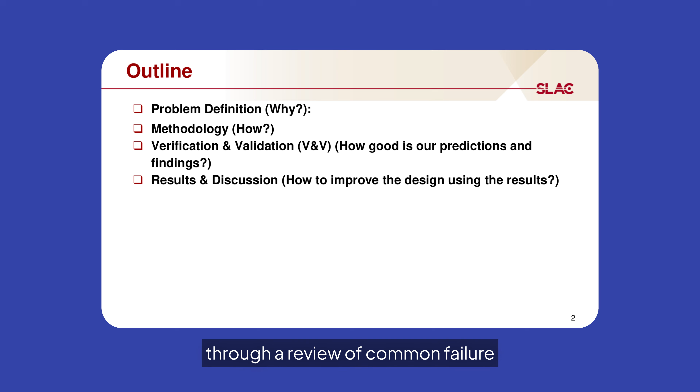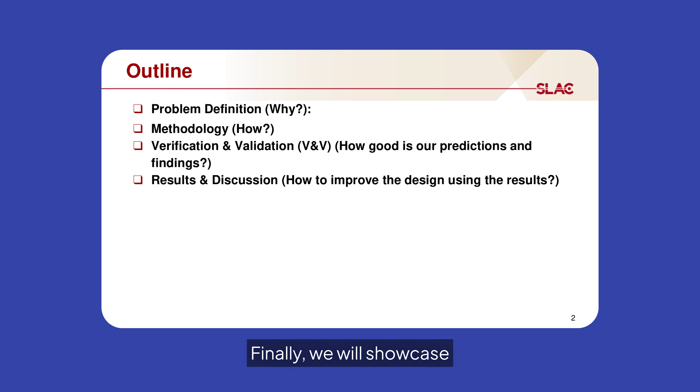Today's session is structured as follows. We will begin by defining the problem through a review of common failure mechanisms in microelectronics and semiconductor devices. We will then introduce our methodology for addressing reliability throughout the design and development lifecycle. Finally, we will showcase representative case studies and discuss how we ensure that our reliability engineering methods accurately correlate with real-world behavior. Let's get started.

Let's first review why reliability engineering is important in the life cycle of microelectronics and semiconductor devices. With continued hardware scaling and rising computational demand, electronic components are exposed to increasingly severe thermal and electrical stresses. Reliability modeling and testing enable us to understand how these stresses can evolve into failures over time.

At the same time, the effect of these failures is very important. For example, the financial impact of unplanned downtime in a data center, often reaching millions of dollars per hour, makes reliability a critical business priority. In industries such as aerospace, medical devices, and national infrastructure, failures are not only costly, but can pose serious safety risks. Reliability engineering ensures that these systems meet the stringent performance and safety requirements demanded by their applications.

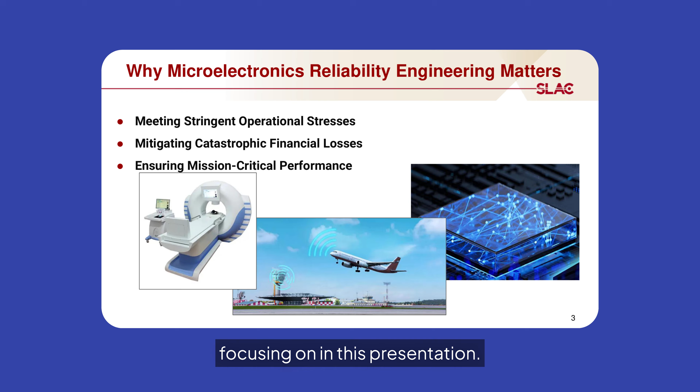With that context, let's take a closer look at the scope of reliability engineering we are focusing on in this presentation. Reliability engineering is an essential part of the design cycle. It provides an end-to-end framework that transforms performance and lifetime requirements into actionable test items, which then become part of the design validation plan and report, DVP&R.

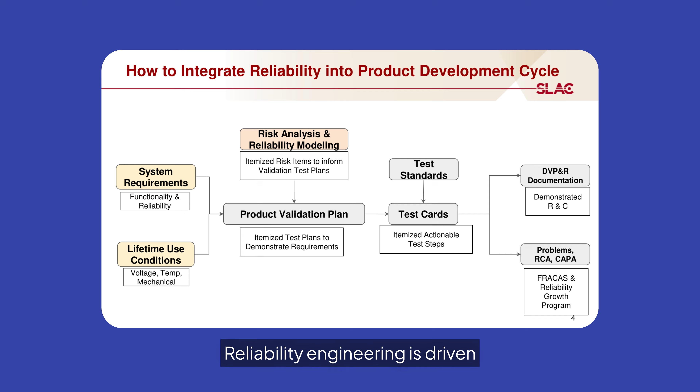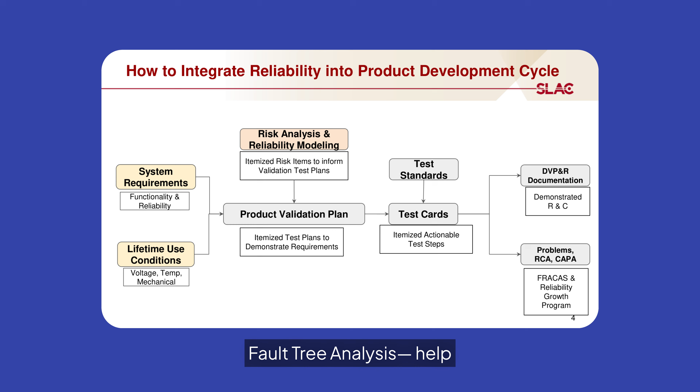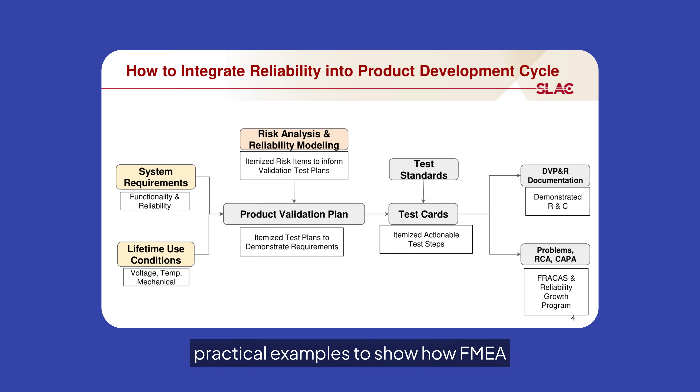Reliability engineering is driven by structured risk assessment and enables a graded approach to design validation. We use tools such as failure mode and effects analysis, FMEA, to identify and manage risk. Reliability modeling methods, such as fault tree analysis, help reveal reliability bottlenecks and quantify system-level risks. We will review several practical examples to show how FMEA and fault tree modeling supports robust, failure-resistant electronic system design.

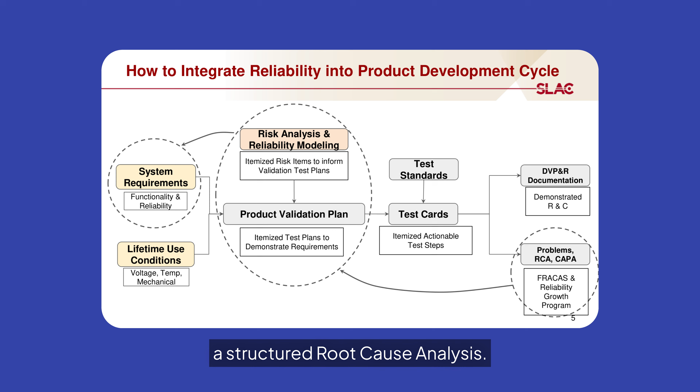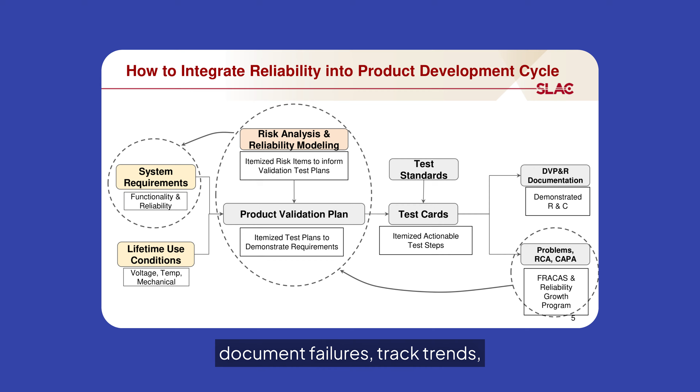The importance of a strong feedback loop in the product design cycle is illustrated here. Any issues observed during reliability testing must be fed back into the design process through a structured root cause analysis. The Failure Reporting, Analysis, and Corrective Action System, FRACAS, is the industry standard framework used to document failures, track trends, and identify opportunities for both corrective actions and preventive actions, CAPA.

CAPA is a formal structured program that requires proper documentation, traceability, and verification of effectiveness. In many industries, especially medical, aerospace, and other regulated sectors, CAPA activities must also be communicated to the appropriate certification or regulatory agencies.

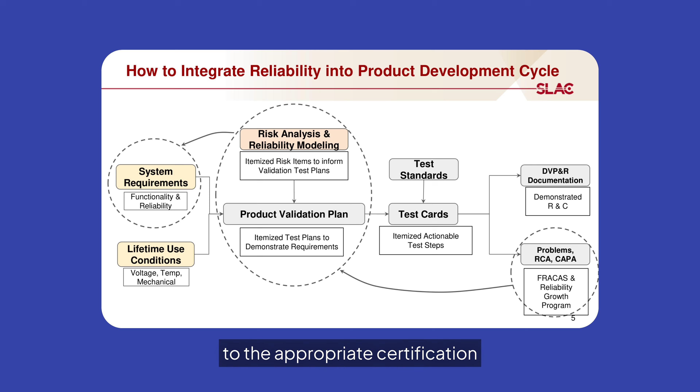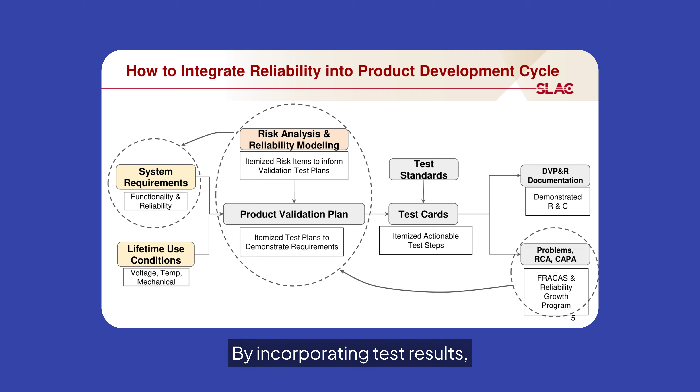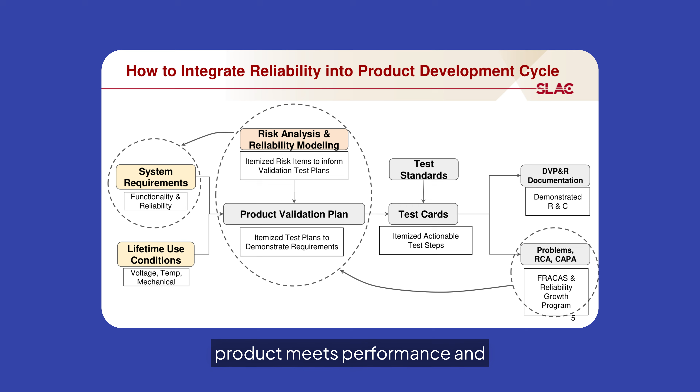In parallel, a reliability growth program provides a systematic approach for identifying and eliminating failure modes throughout development. By incorporating test results, corrective actions, and design improvements, the program quantitatively measures reliability improvement over time, ensuring that the final product meets performance and lifetime requirements.

Now let's dive into a specific example where we walk through three main reliability engineering steps: risk assessment, reliability modeling, and reliability test planning.

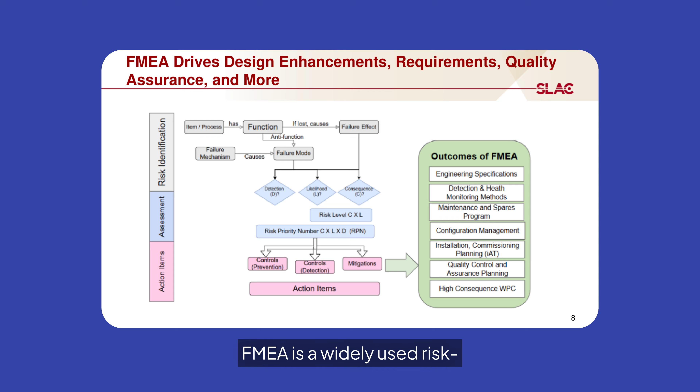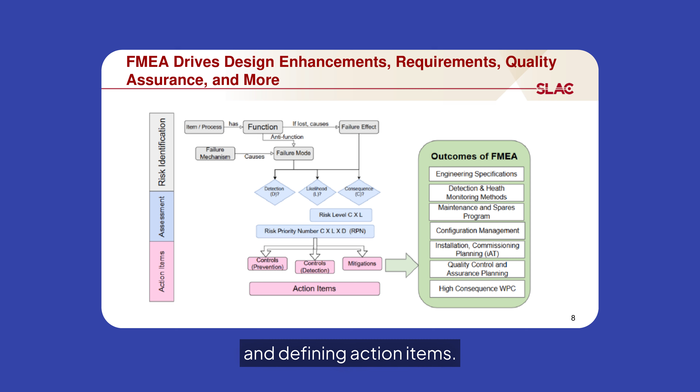First, let's focus on risk assessment and examine how it forms the backbone of our reliability engineering approach. FMEA is a widely used risk assessment tool that provides a qualitative measure of risk. The process consists of three major steps: risk identification, risk assessment, and defining action items.

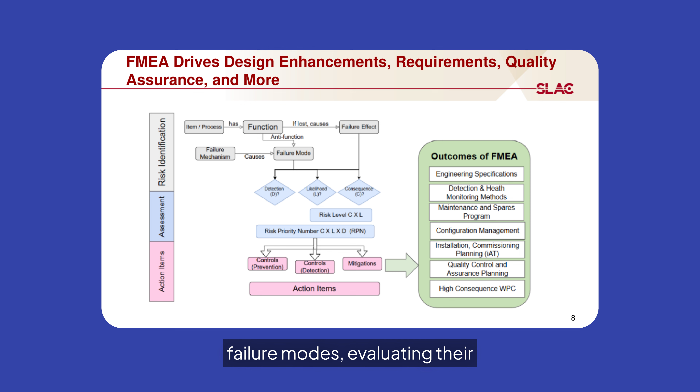The diagram illustrates the typical workflow, beginning with the identification of potential failure modes, evaluating their severity, occurrence, and detectability, and finally translating the resulting risk mitigation strategies into actionable outputs such as updated requirements, quality assurance plans, and other control measures.

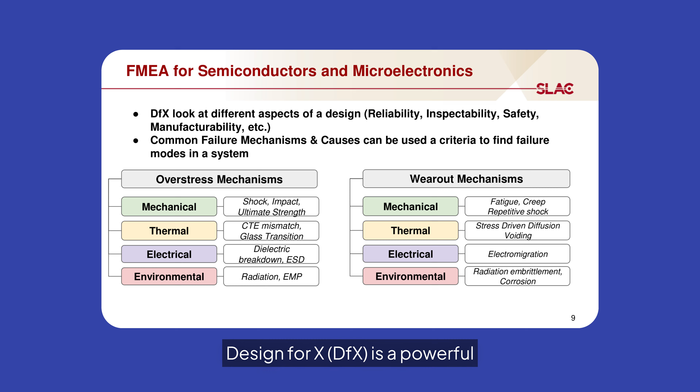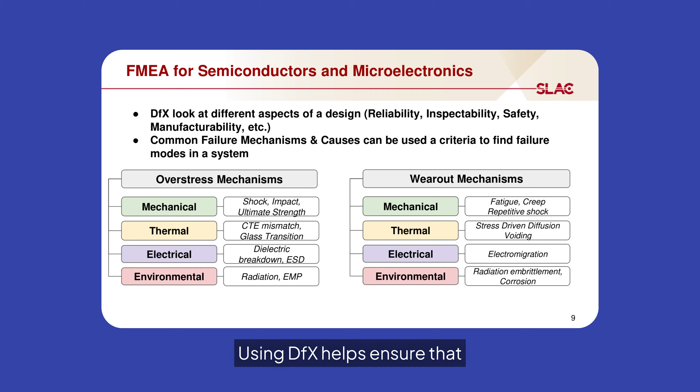Design for X, DFX, is a powerful framework for identifying potential failure modes and their root causes early in the design cycle. The X can represent reliability, maintainability, inspectability, safety, manufacturability, and more. Using DFX helps ensure that risks are systematically addressed rather than discovered late in testing or in the field.

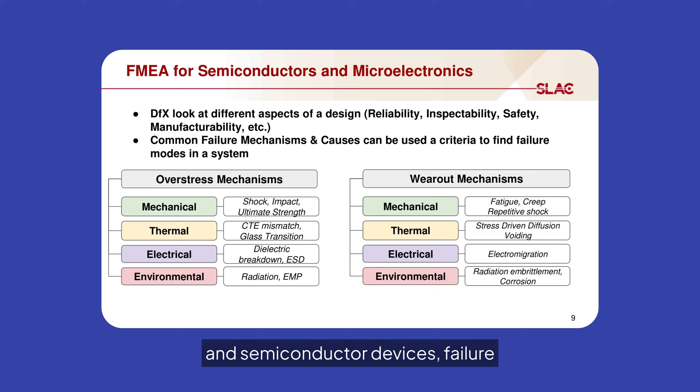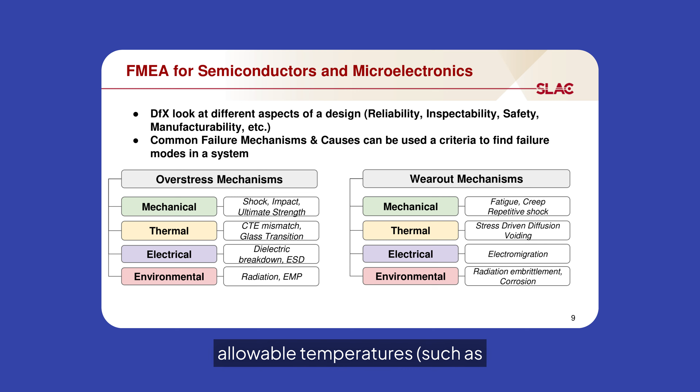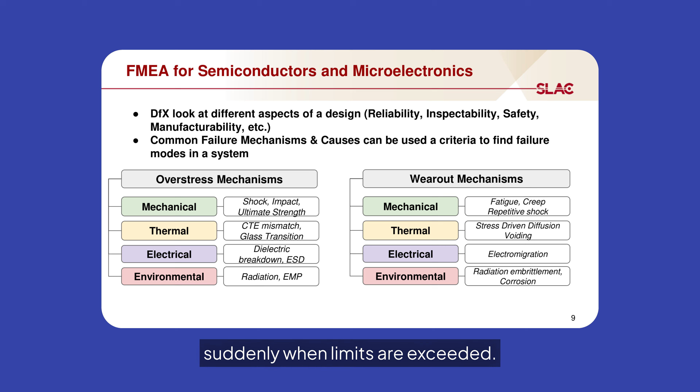In power electronics and semiconductor devices, failure mechanisms generally fall into two broad categories: overstress and wear-out. Overstress mechanisms relate to performance under extreme or unintended conditions. Examples include mechanical shock, excessive electrical or thermal loads. Thermal shock: operation beyond maximum allowable temperatures, such as exceeding glass transition temperature, dielectric breakdown, and ESD events. These failures typically occur suddenly when limits are exceeded.

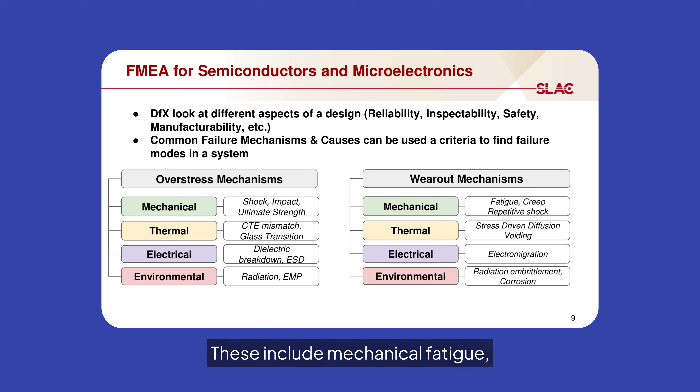Wear-out mechanisms, on the other hand, represent degradation that accumulates damage over time and ultimately limits the lifetime of the device. These include mechanical fatigue, repetitive thermal cycling, electromigration, corrosion, and other progressive damage processes.

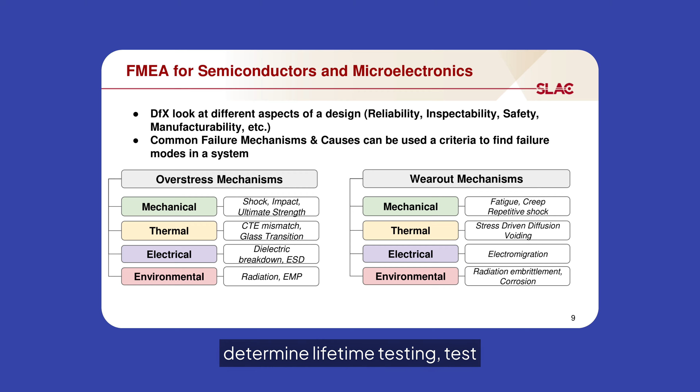Being able to distinguish between overstress and wear-out mechanisms is essential when planning design validation. Overstress mechanisms guide performance limit testing, whereas wear-out mechanisms determine lifetime testing, test acceleration evaluation, and qualification strategies. We will take a closer look at several of these mechanisms, how to test for them, and how they integrate into reliability modeling.

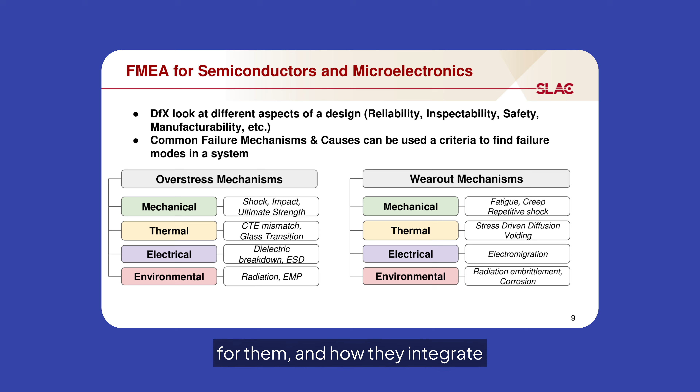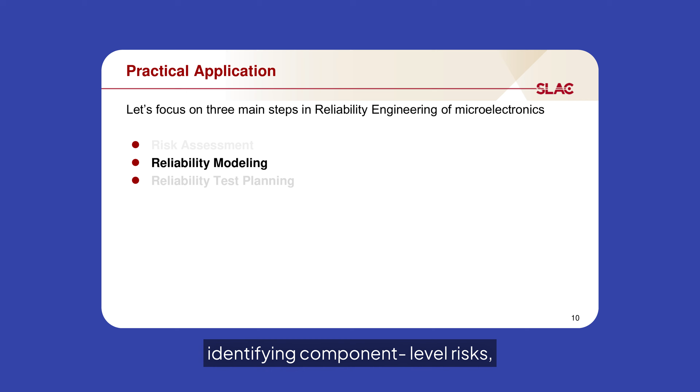Now let's move to a critical step in our reliability analysis: reliability modeling. Reliability modeling, such as reliability block diagrams or fault trees, provides a system-level view of how components and subsystems interact, allowing us to identify critical failure pathways and single points of failure. While FMEA is effective for identifying component-level risks, it often cannot capture complex subsystem interactions or cascading failures.

For complex systems, this makes reliability modeling a necessary next step beyond traditional FMEA. The objective of reliability modeling is to build a digital twin of the hardware that enables design optimization and comprehensive what-if studies. In this presentation, we focus specifically on fault tree analysis, FTA. The alternative approach, reliability block diagram, RBD modeling, is not covered here.

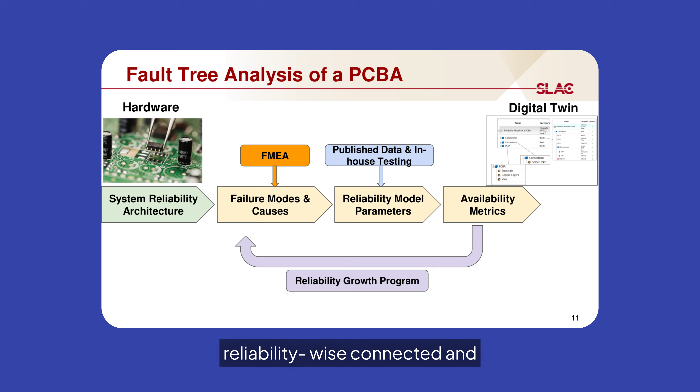the fault tree as additional field failure insights become available. Once the components are selected, we determine how they are reliability-wise connected and assign their corresponding failure modes and causes, again using FMEA as a starting point when applicable.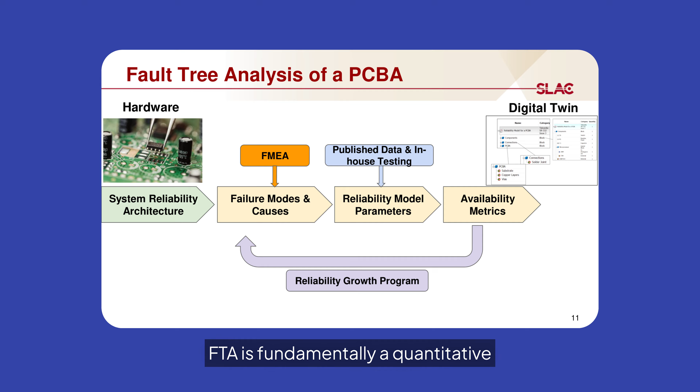FTA is fundamentally a quantitative risk ranking tool, so each failure mode must be associated with an appropriate reliability model to estimate its probability of failure over time. These reliability models, combined with maintenance and spare parts strategies, form the foundation for overall availability analysis.

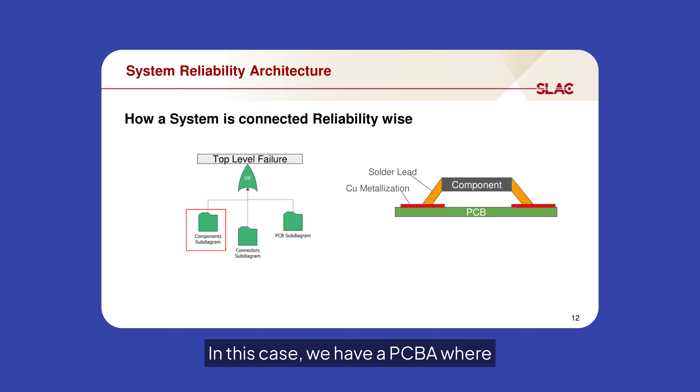Ultimately, the fault tree results enable us to propose targeted design improvement recommendations and support data-driven decision-making across engineering and operations. Now let's focus on an example and walk through all the steps discussed so far. In this case, we have a PCBA, where the PCB is connected to a component.

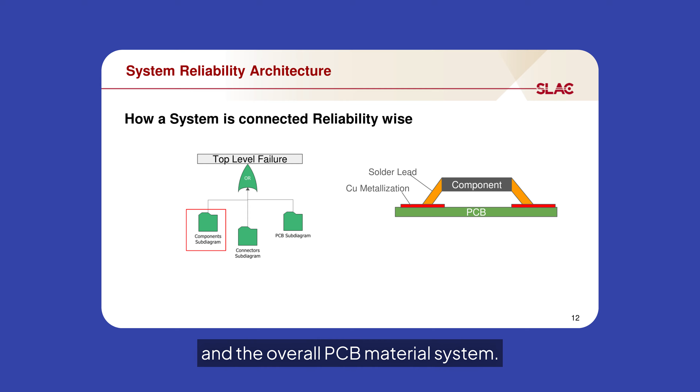As shown in the diagram, the FTA is organized into several sub-diagrams, which act as folders that group common components and their associated failure causes. For example, the PCB subdiagram may include vias, traces, and the overall PCB material system. The connector subdiagram may contain braze joints, ball connectors, and other electrical or mechanical interfaces.

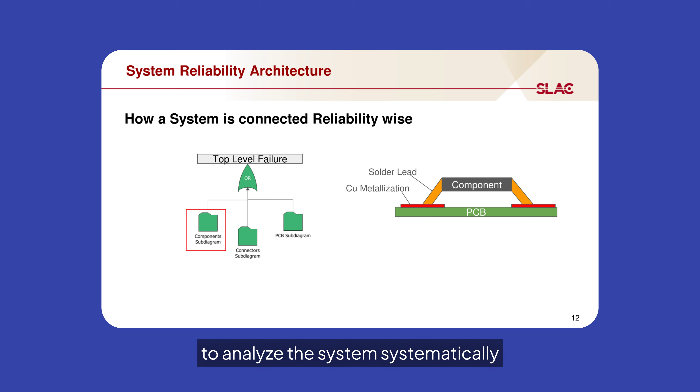Finally, the component subdiagram includes all critical components that we have selected for the fault tree analysis based on their risk level and relevance. This structured breakdown allows us to analyze the system systematically and trace how individual failure mechanisms propagate upward to system-level failure modes.

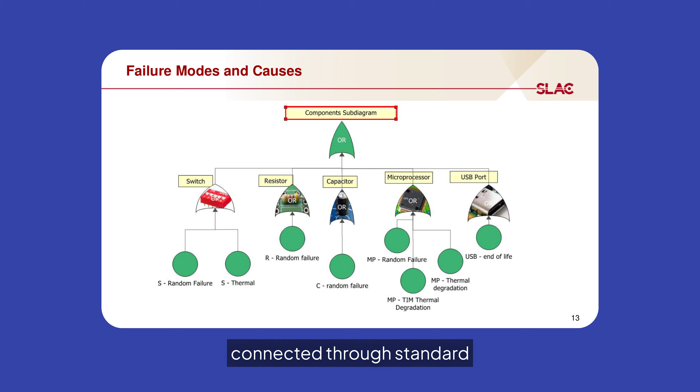We focus on the component subdiagram hereinafter. As shown here, the component subdiagram contains multiple components, each with one or more associated failure causes, connected through standard fault tree logic gates. The OR gate is the most common configuration, representing a series reliability relationship, meaning that the failure of any component will propagate upward and result in the top-level failure event.

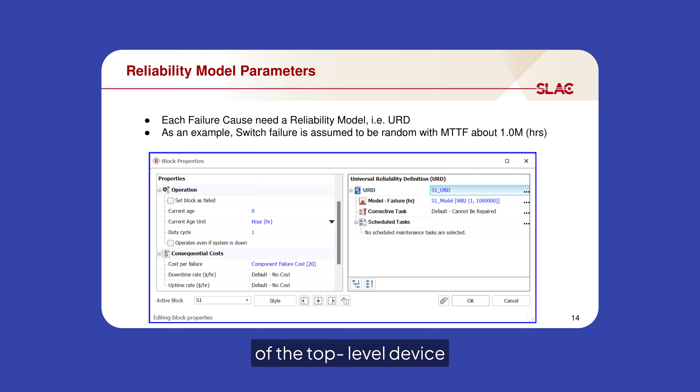The reliability and availability of the top-level device can be computed analytically or numerically, provided that accurate reliability and maintainability models have been assigned to each failure cause. In ReliaSoft BlockSim, the combined set of these models is referred to as the URD, Universal Reliability Definition, which serves as the foundation for system-level reliability and availability calculations.

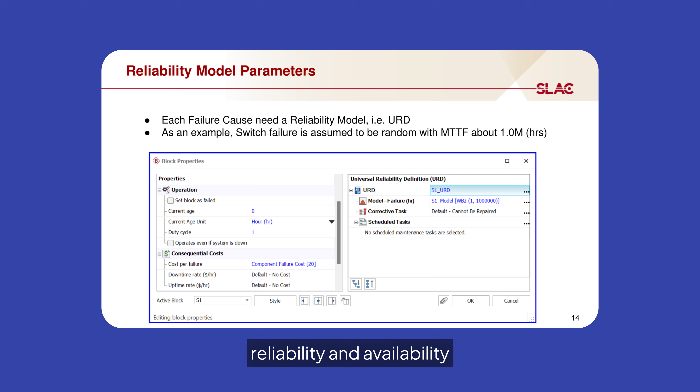A reliability model requires accurate failure data in order to produce meaningful predictions. For microelectronics, failure data can be obtained from established published sources such as Military Handbook 217, Bellcore, and Telcordia databases. However, for new systems or operating conditions that fall outside existing databases, reliability test planning becomes a critical step in

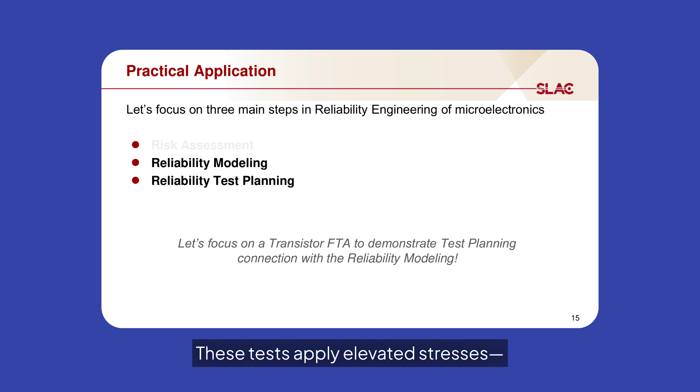generating representative failure data. In this section, we focus on how reliability testing is planned for microelectronics to support model development and validation. To generate failure data within a practical timeframe, we rely on accelerated reliability testing. These tests apply elevated stresses such as temperature, voltage, current, or power cycling to accelerate the dominant failure mechanisms while preserving the underlying physics of failure.

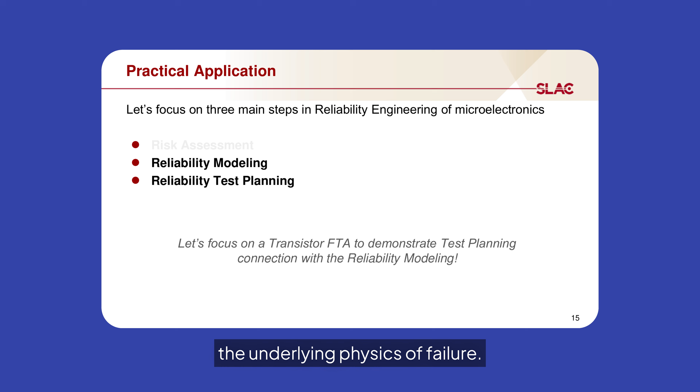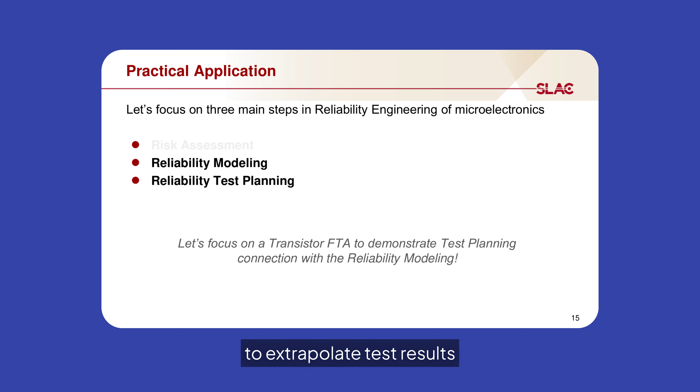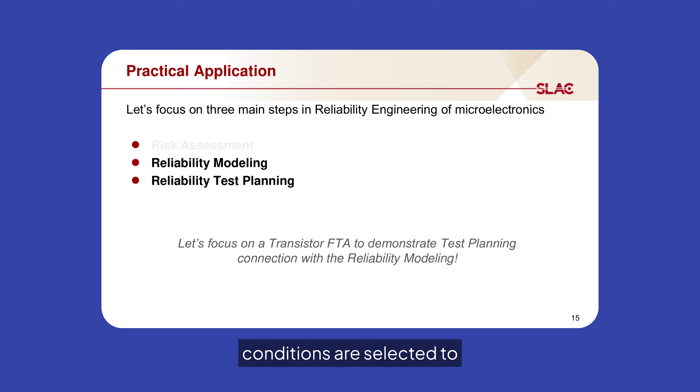The key objective of accelerated testing is not simply to induce failures, but to do so in a controlled way that allows us to extrapolate test results back to normal operating conditions using validated acceleration models. In the next example, we will walk through a transistor reliability test plan and show how test conditions are selected to isolate specific failure mechanisms and extract meaningful lifetime data.

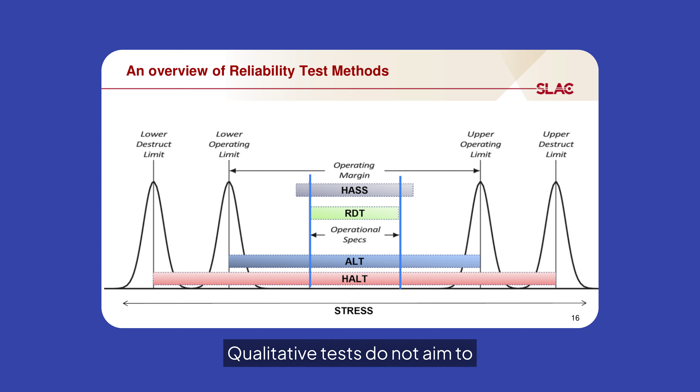First, let's overview reliability testing. Reliability tests can be broadly classified into qualitative and quantitative approaches. Qualitative tests do not aim to prove that the product meets reliability requirements. Instead, they are torture tests designed to uncover hidden failure modes early in the design cycle, so these issues can be eliminated before full production.

Examples include highly accelerated lifetime testing, HALT, and other stress-based tests. Quantitative tests, on the other hand, are designed to demonstrate product reliability under specific use conditions and environments. For example, a test may aim to show that a product will survive R90C80 conditions for 10 years of use. Quantitative testing also targets infant mortality failures, using methods such as end-of-line testing or highly accelerated stress screening, HASS, to catch units with early defects.

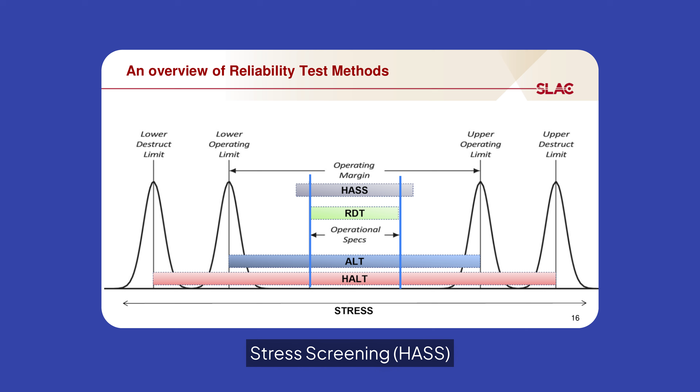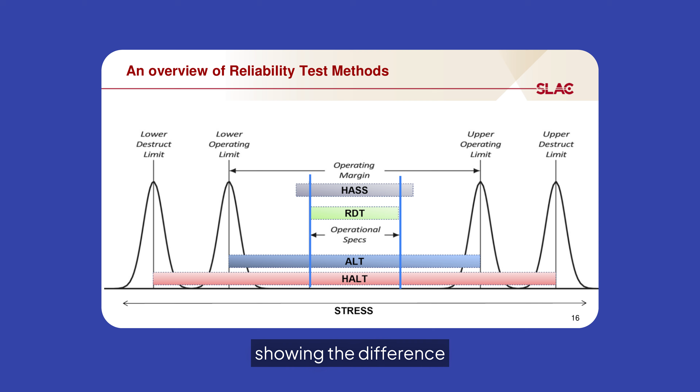Accelerated lifetime testing, ALT, is the main methodology for quantitative reliability testing. It defines a stress-life relationship for the product, either under single-use stress conditions or across multiple stress levels. To illustrate this, we will walk through an example focused on electromigration failure mechanisms, showing the difference between single and multiple stress level ALT approaches.

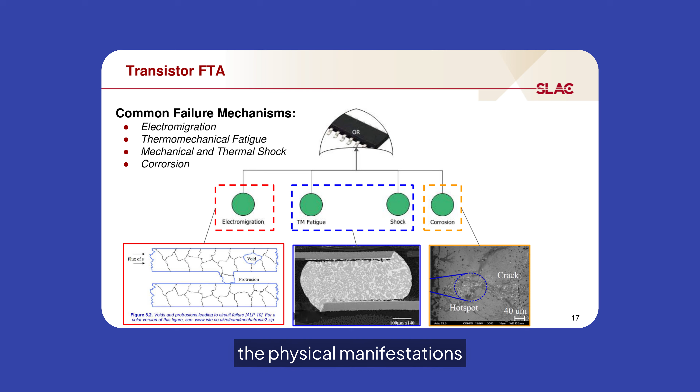Here we are showing the fault tree of a transistor, highlighting four common failure mechanisms: electromigration, thermomechanical fatigue, mechanical and thermal shock, and corrosion. The accompanying pictures illustrate the physical manifestations of these failure mechanisms. We will now walk through reliability test planning and modeling for each of these failure mechanisms.

This concludes part 1 of our video series. Please continue to part 2, where we dive into the details of reliability modeling and testing using our transistor example. Thank you for your attention. We hope this session has provided valuable insight into the importance and practical application of reliability engineering in semiconductors and microelectronics.